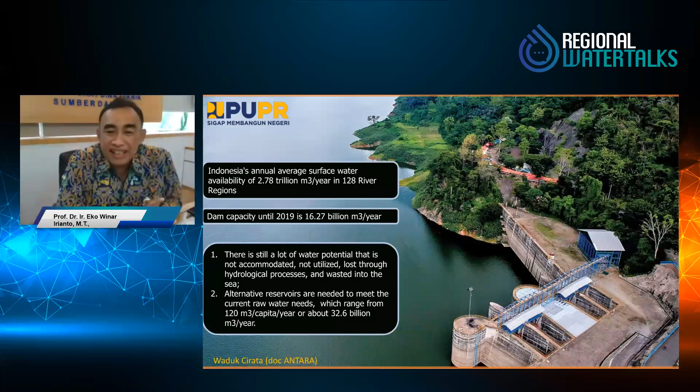But first, there is still a lot of water potential that is not accommodated. This is the problem: the main issue is that water is not utilized, and it is also lost through the hydrological process, flowing into the sea freely, not being used.

The second point is alternative reservoirs. Not only conventional reservoirs are needed to meet the current raw water needs, which range around 120 cubic meters per capita per year, or about 32.6 billion cubic meters per year.

Now, in Indonesia we have 34 provinces, and around 23 of the provincial capitals are located in coastal areas. So this represents a potential for the application of estuary dam technology.

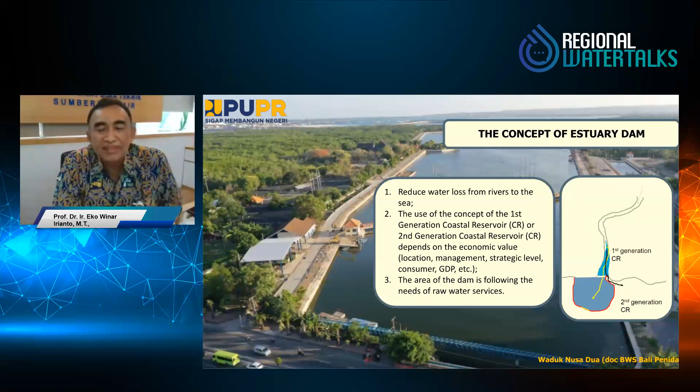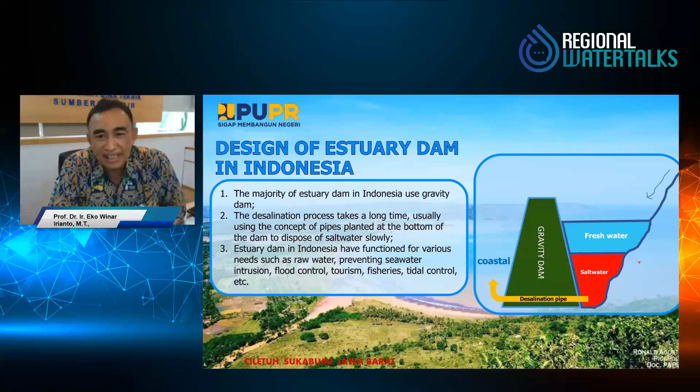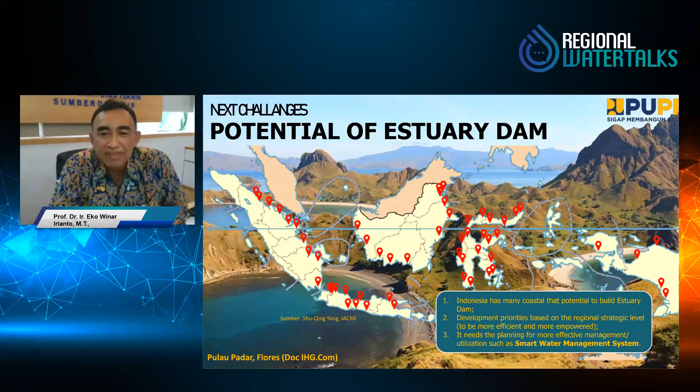The second point is development priorities based on the regional strategic level. Before we build the estuary dam, we need a feasibility study to ensure it's suitable for the location. The third need is planning for more effective management, such as improving system utilization through a smart water management system.

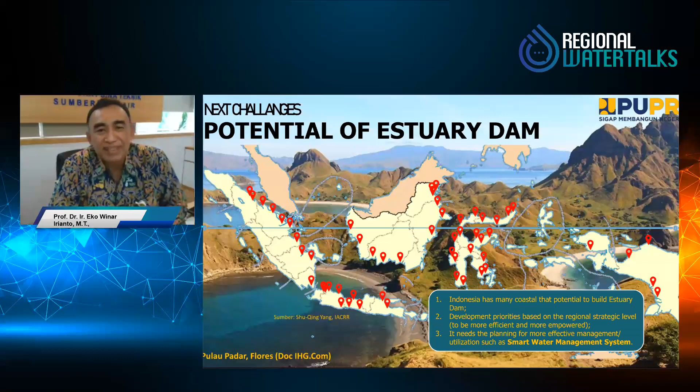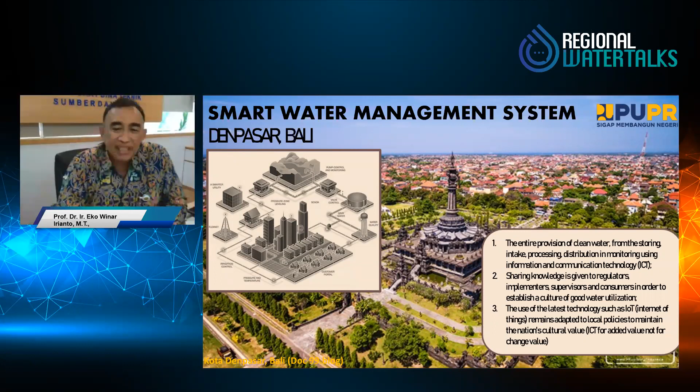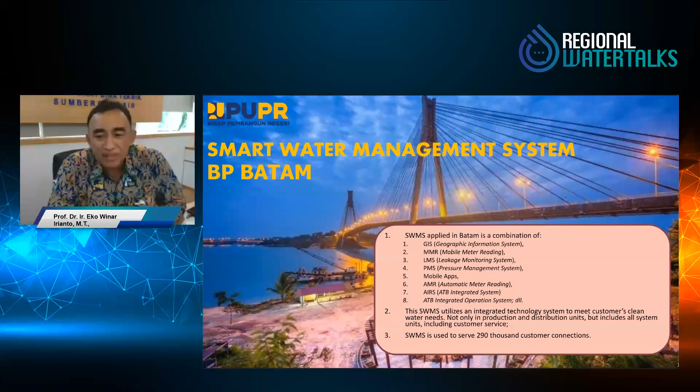This smart water management system utilizes an integrated technology system to meet customers' clean water needs—not only in production and distribution units, but including all system units, including customer service. In Batam, the smart water management system is used to serve 290,000 customer connections.

I will explain about the first generation coastal reservoir, or first generation estuary dam, and also the second generation of estuary dam in Indonesia. First is the Duriangkang Dam in Batam.

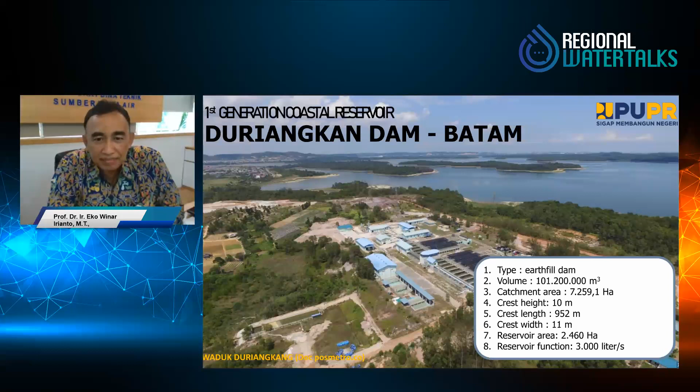This is Monggak Rempang dam in Batam. This is an earthfill dam type. The volume is around 4.5 million cubic meters, and the crest height is 8 meters, so less than 10 meters, not so high. But the reservoir area is around 155 hectares, and the reservoir function is around 232 liters per second.

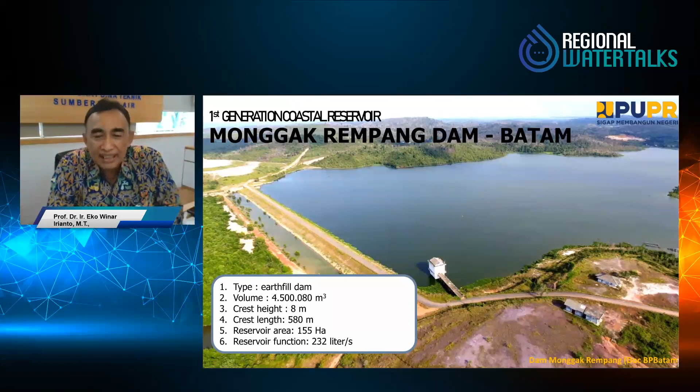This is a first generation coastal reservoir or estuary dam in Bali, called Nusa Dua estuary dam. The type is earthfill dam, the volume is around 770,000 cubic meters, and the crest height is 2.85 meters. This is very low, not so high, but the catchment area is rather large, 40.95 square kilometers. The reservoir area is only 35 hectares, but the reservoir function is around 300 liters per second. So Nusa Dua estuary dam serves the Nusa Dua tourism area.

This is the concept of Nusa Dua estuary dam. This is one of the public green open spaces in southern Bali.

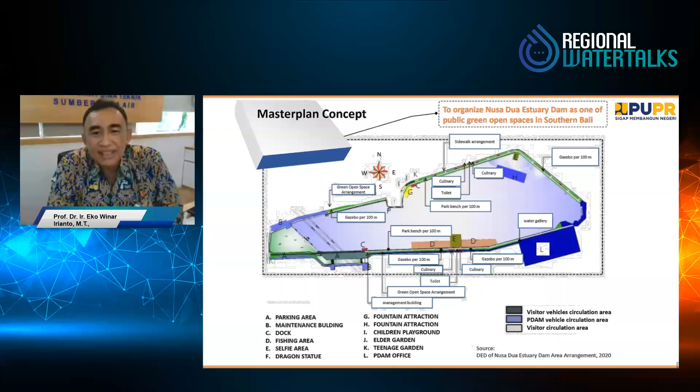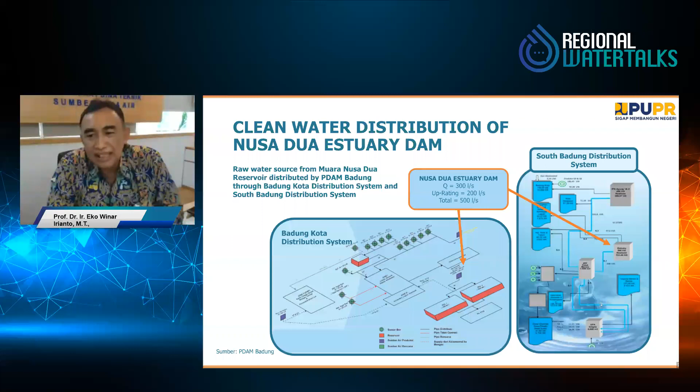Nusa Dua estuary dam serves the South Badung or Badung Kota distribution system, including the Nusa Dua distribution system.

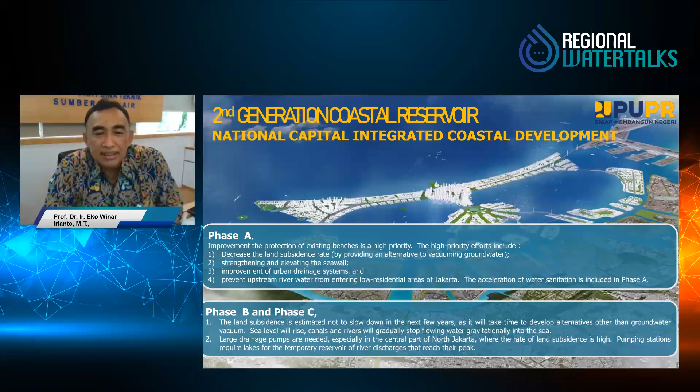We are now still studying the second generation coastal reservoir or estuary dam, which will be built in the national capital, in northern Jakarta. It's still a study, called the National Capital Integrated Coastal Development.

In the study there are 3 phases, but phase A is improvement. Before building the estuary dam, we must give high priority to decreasing the land subsidence rate, because the problem in northern Jakarta is that the land subsidence rate is rather high. So we need to decrease the land subsidence rate, with one alternative being to reduce groundwater extraction.

The second is strengthening and elevating the seawall, and then improvement of the urban drainage system. The fourth is preventing upstream river water from entering low residential areas. This is like a polder system. We need to build the polder system to reduce the flooding area and accelerate water sanitation around the northern Jakarta area.

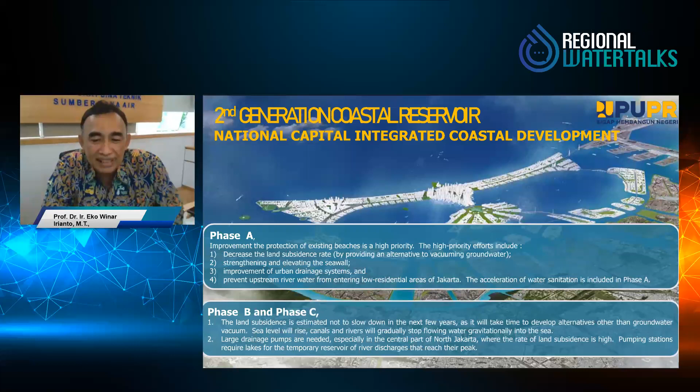Large drainage pumps are needed, especially in the central part of North Jakarta, where the rate of land subsidence is high. So pumping stations require something like a pond, what we call a polder, for temporary reservoir, in order to handle river discharge, especially at peak conditions.

This is just a little presentation from me, and we hope this can explain the application of estuary dams in Indonesia. Thank you very much for your attention, and now back to the Master of Ceremony.

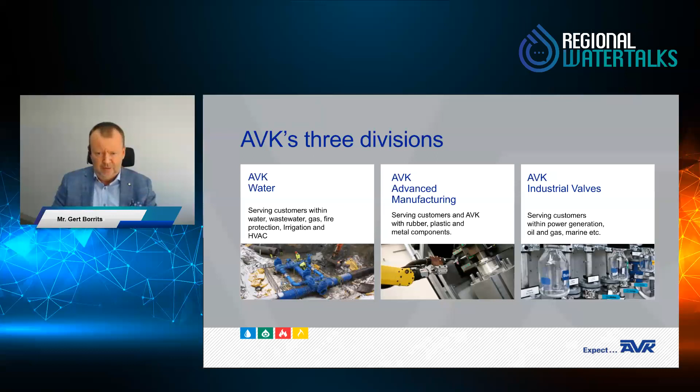We are working in three main divisions. We have AVK Water - I'll get into a bit more detail on that in the next few slides - and then we have AVK Advanced Manufacturing, and we have also AVK Industrial Valves. We'll go into more details now.

We have a main theme, we call it Expect AVK, which also serves as a commitment to our market. We have 8 promises in our company structure: Expect quality in every step. Expect solutions, not just products. Expect lasting innovations. Expect long-term partnership. Expect total savings. Expect global leadership and local commitment - I think the enormous amount of companies we have around the world certainly expresses the local commitment very well. And expect prompt response, and expect to be effective and easy. Those were the main 8 promises we have to our customers and the market.

In Southeast Asia we have 5 main companies, and then we have a small branch in Phuket and in East Malaysia. We have our sales company in the Philippines, in Manila. We have a sales company in Vietnam, in Ho Chi Minh City. And then we have our sales company here in Jakarta, covering Indonesia and East Timor. We have our sales office in Singapore. And then we have a combination of sales office and production facilities in Malaysia, where we can assemble most of the key products within our water business. We're also doing a broad range of stainless steel repair clamps for the Southeast Asia market.

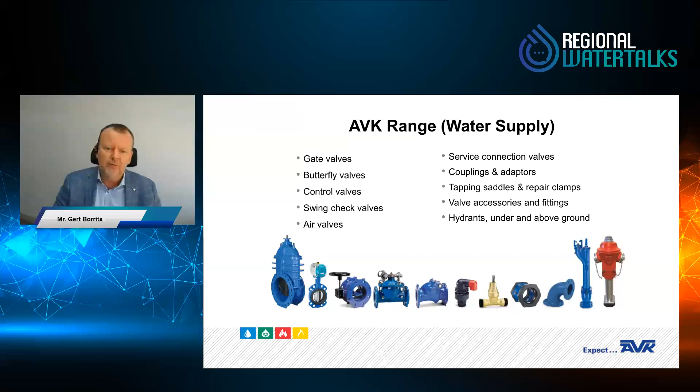But I do want to recommend, if you have more interest, to go to our web page. At the beginning of our web pages you have a selection program that will guide you to what sort of products you need for each application and installation. It'll simply come up with some suggestions for you, so I recommend you go in and have a look at it.

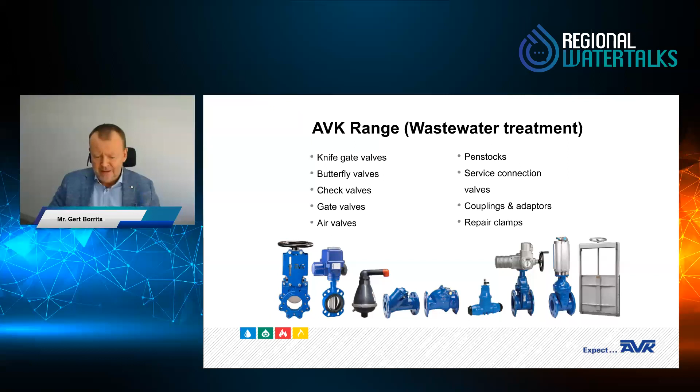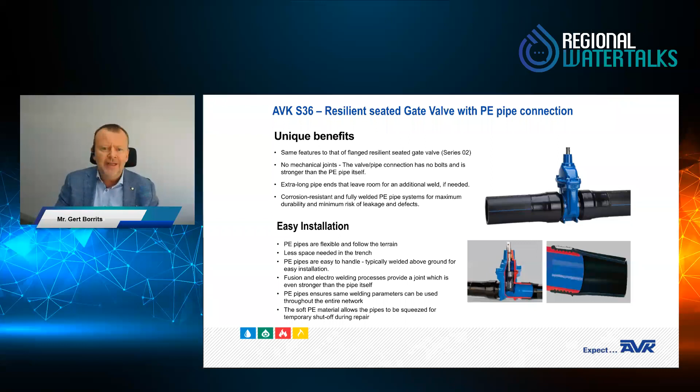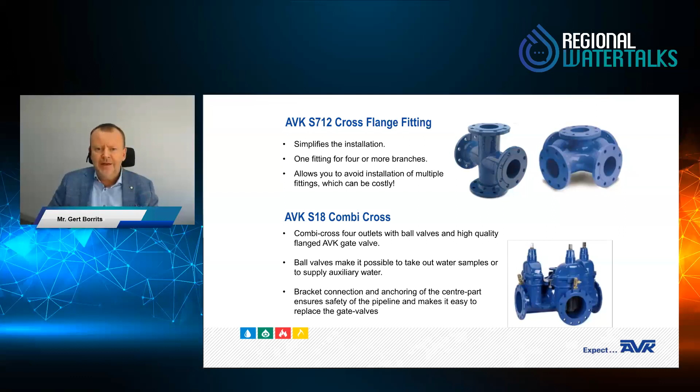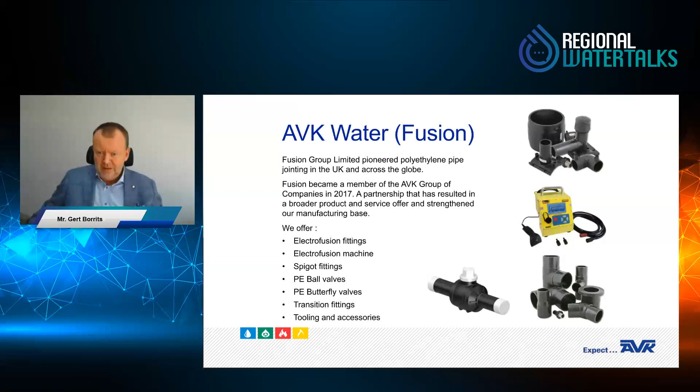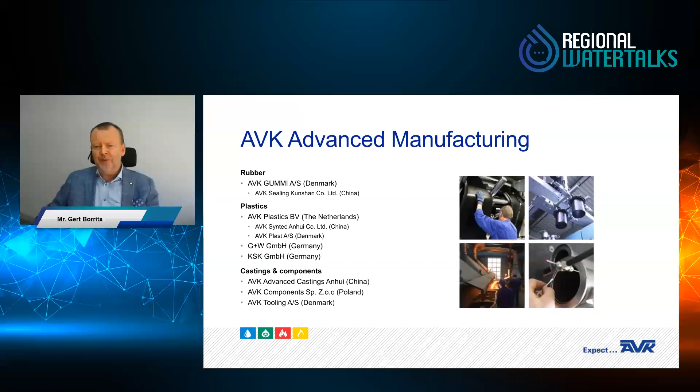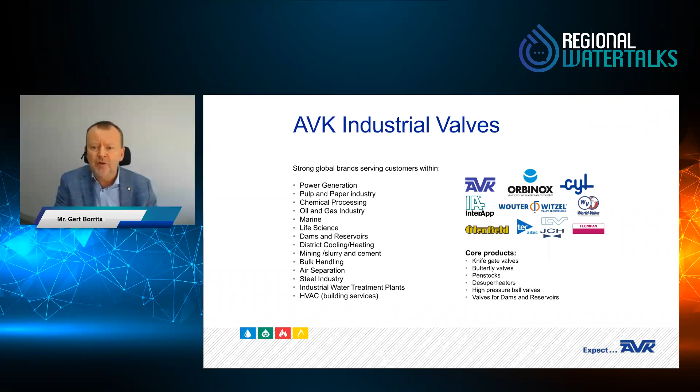All right, next slide, please. Am I off again?

The next slide, please.

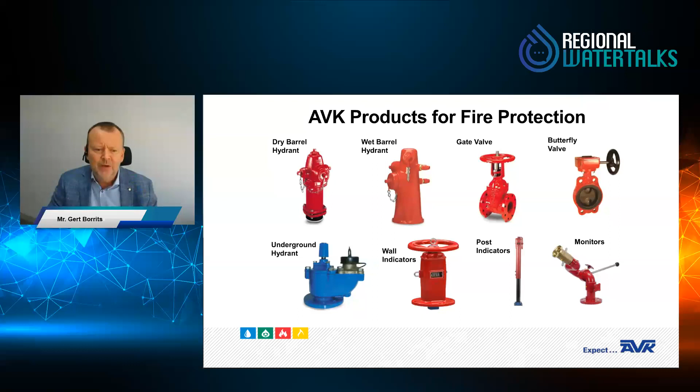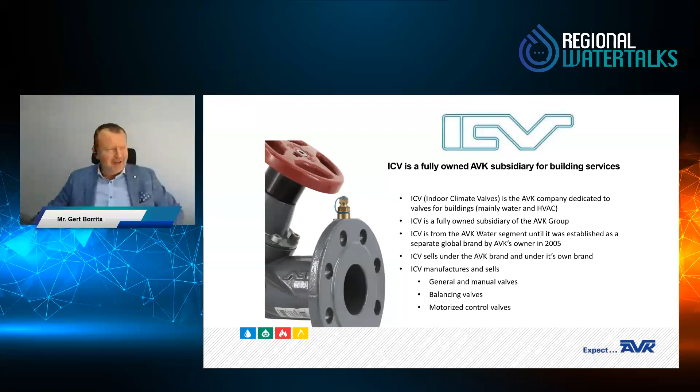Excuse me, your sound is cracking, you might want to check the microphone connection to the cable. Is it better now? It's cracking, so we cannot listen to you clearly. Maybe just speak a little slower, I think it's the microphone. Maybe you can change to wire mic. Let me just try here. Can you help me change it? Sorry about that. No, that's okay, I think everyone's agreed there's always some quirk in Zoom sessions. Is it better now? What about now? It's still distorted. I'm not sure what to do. Can I get it over to the computer? Let's do that then. Take it out from the speakers here, right? This one here, right? Can you please try mute it and unmute it? Hello. Is that better with the sound? Honestly, I still don't know, it's distorted, everything is bad. Maybe because I got my second vaccine last night, so maybe it's taking effects on the voice as well.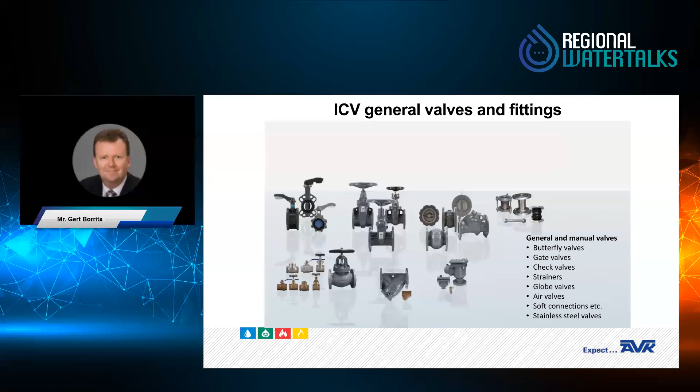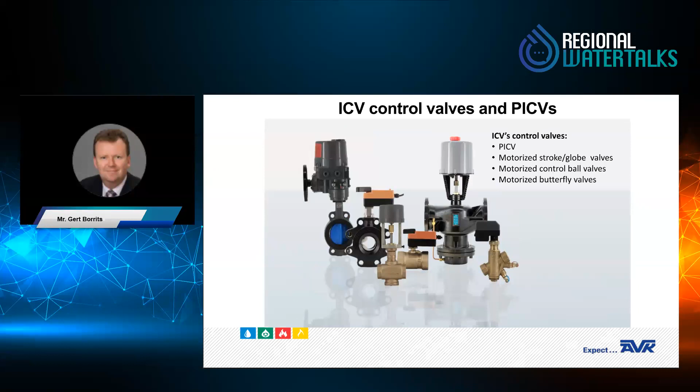And the next one. And the next one.

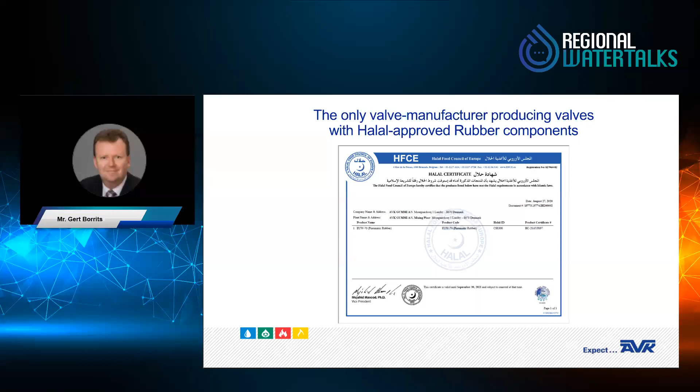Now I'll try to go in and give a brief information about dams and reservoirs. I want to stress before I start that this will be brief, but if you have interest in dams and reservoirs, I know here in Indonesia we are developing a lot of new dams and reservoirs. There's a lot being built at the moment, but also a lot in the planning stage. So some of you might want to hear more about that, and I will urge you to contact any of our companies in the region. But here, just a brief information and introduction of what we can actually provide into dams and reservoirs.

The next one, Jan, please.

So dams functions, as we see it: clean water reservoirs, power plants, flood controls, irrigation. Actually a lot of the dams that are being built and planned for at the moment have a multi-purpose usage, so they're not only used for clean water, but also used for power stations, for cooling water, to act as flood control, and also for irrigation. So when you have a dam and reservoir project, you also tend to have a lot of other opportunities in terms of valves. That's why this segment is very important for us as well.

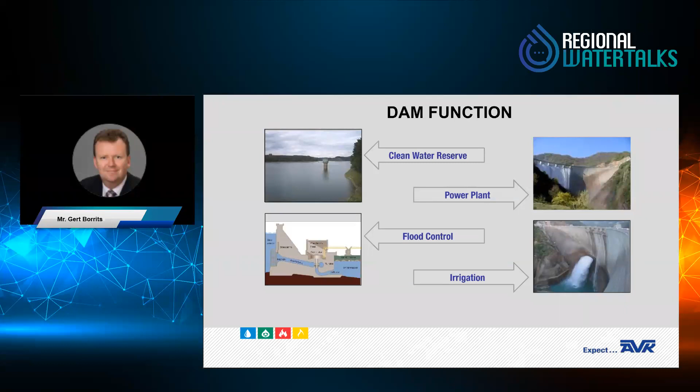Next slide, please. Different applications: bottom outlets, systems. They're all different, of course. Depending on the design, we use different products, obviously. Spillways and canals.

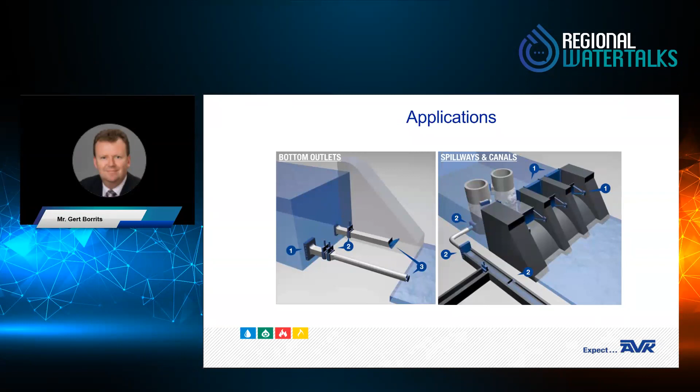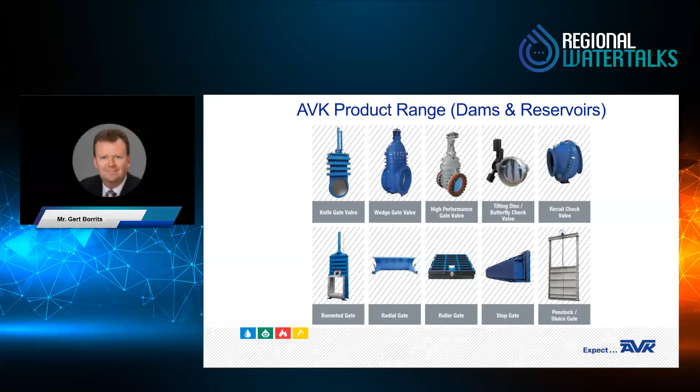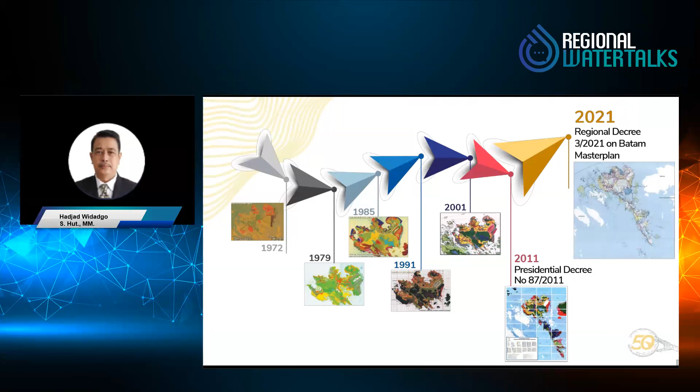Now for implementation of government regulation number 41 of 2021: this is the strategic policy for managing the free trade zone and free port of Batam, Bintan, and Karimun, to improve the investment ecosystem and enhance economic growth opportunity and regional competitiveness. For water availability, we have cooperation between Batam Island, Bintan Island, and Karimun Island. I think this is our challenge and our opportunity to secure water for the future.

We have infrastructure in Batam Island free trade zone, like Hang Nadim International Airport Batam, seaport, electrical power supply, expansion of BP Batam Hospital, road infrastructure including Barelang Bridge, internet and telecommunication, an IT center, and 7 operating plus 2 water reservoirs under development.

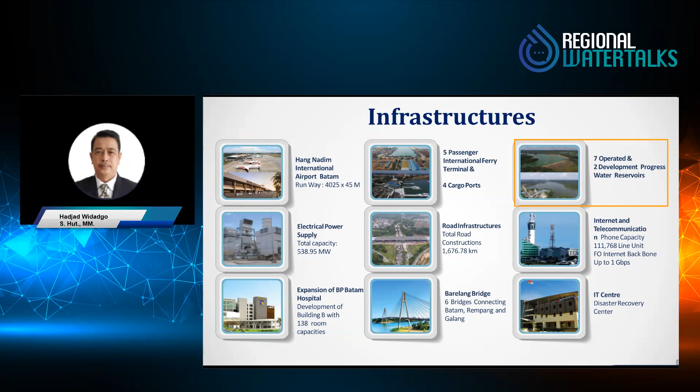We have about 26 industrial estates, and industry needs about 30% of the water availability in Batam. So water availability is very important for the competitiveness of the industry area.

Another influence on the availability of water to provide to the Batam free trade zone is the population and workforce. In 2020, the population in Batam was more than 1,400,000 people.

As I mentioned before, Batam Island, Setoko, Rempang Island, Galang, and Galang Baru are connected with the Barelang Bridge. We have the bridge that connects the islands. Our coastal reservoir can transfer the water, the raw water or the clean water, to another island using the connection from Barelang Bridge.

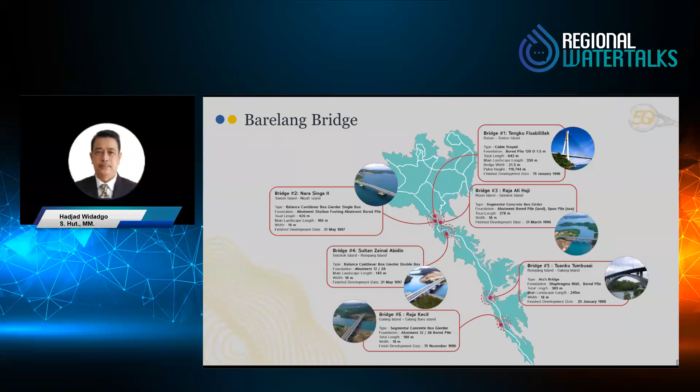We're talking about coastal reservoir. Our fresh water total volume is about 151 million meter cubic. And our water treatment plant design capacity is 4,682 liters per second, total capacity now about 3,850 liters per second, and operational at 3,600 liters per second.

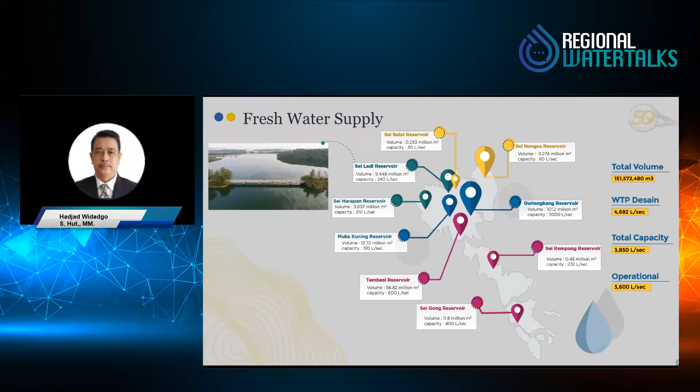Freshwater supply that we present now, we're talking about in the orange circle: the first coastal reservoir, Duriangkang, Tembesi, and Rempang in Rempang Island.

The development of the coastal dams like Duriangkang, Tembesi, and Rempang - in this case Duriangkang - the process starts from community resettlement from the catchment area and the reservoir area. After we make the resettlement, we clean up the location of the reservoir and catchment area, then we make the pilot dike to develop the platform with sand and earth fill until the height of plus level.

We develop dam complementary buildings like a permanent bottom outlet, intake tower, and spillway. For desalination, we install an uploading pipe of diameter 800 millimeters, and the desalination process runs from this pipe.

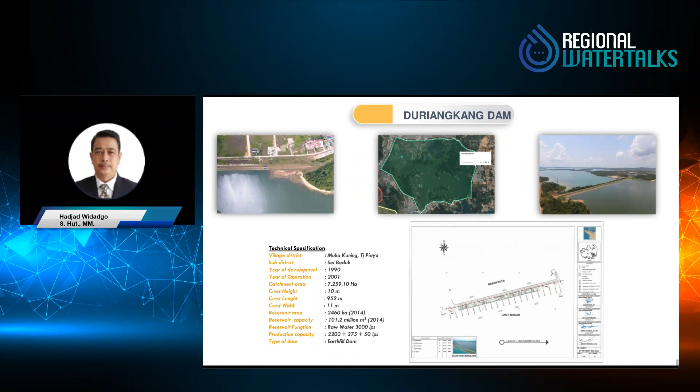This is Duriangkang coastal reservoir. The left side is the reservoir side, and the right side is the sea side. On the sea side we see the vegetation of mangrove around the island in the middle - we call this Dongkol Island, the island that connects from the dam, then from the Batam side, and then the Piayu side.

We see the inlet tower for the permanent bottom outlet, and on the right side the outlet tower. At the outlet tower, from the permanent bottom outlet, we made a special structure to slow the water flow to the sea, because the fishermen might have a problem if we open the gate of the permanent bottom outlet.

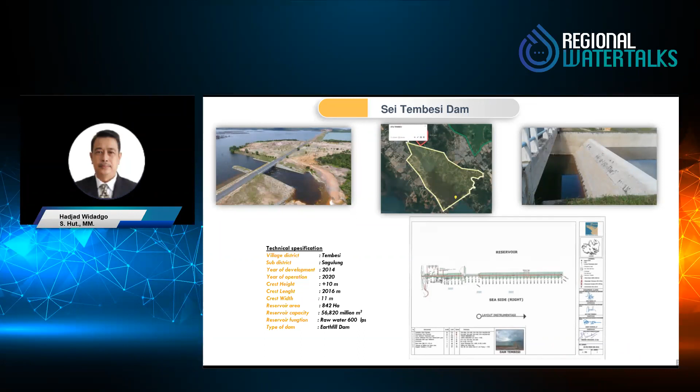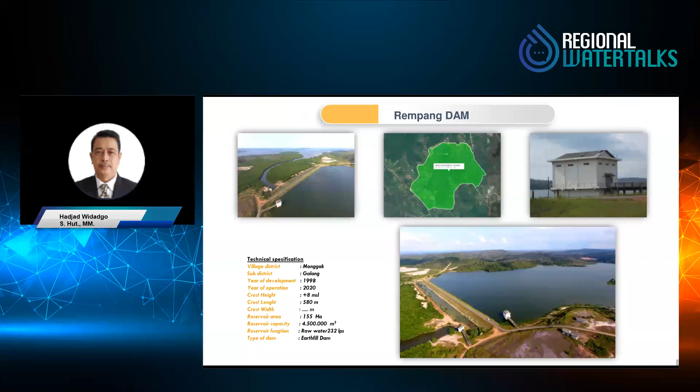We see in the picture the Rempang Reservoir. In the left picture, the left side is the sea and the right side is the coastal reservoir of Rempang Island. In the middle we see the map of our catchment area that is protected by regulation, and on the right side is the intake tower located at the reservoir site. We have about 4,500,000 meter cubic capacity of storage for Rempang Reservoir.

Now about the benefits of coastal reservoirs, and of course together with the challenges.

We have a benefit to reduce land when we build the coastal reservoir, because we save land utilization by not using on-land reservoirs, and we promote more oxygen and carbon sink during photosynthesis. Trees and plants absorb carbon dioxide from the atmosphere and process it into oxygen. As the tree grows, they store carbon in their trunk, branches, roots, and leaves.

The catchment area in the coastal reservoir functions like an urban forest that conserves energy by shading and cooling homes and buildings, increases air quality, reduces water consumption by reducing landscape watering needs, and increases atmospheric moisture. The vegetation in the catchment area also reduces water runoff and soil erosion by breaking rainfall and holding soil.

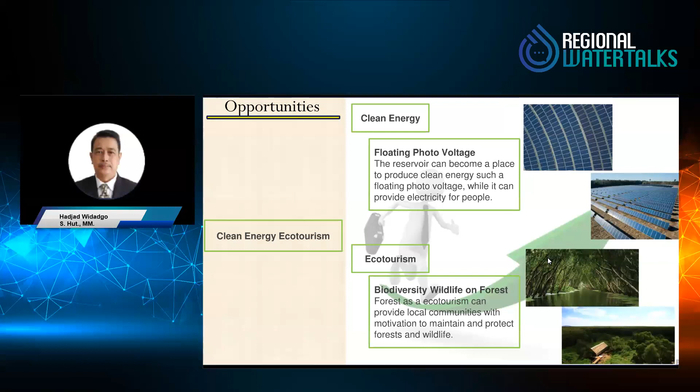But monitoring of the catchment area is very important because of the potential risk of pollution. As there is no intensive cultivation, the risk of pollution from agriculture, like pesticide and herbicide, is not significant. But now we have challenges like illegal farming and others, so we should overcome it.

The main risk also comes from industry and human presence related to industrial activity. Pollution control arrangements to provide catchment area protection, and pollution control for the protection of Duriangkang Reservoir, are a matter of great concern, and appropriate measures must be taken as much as possible to maintain the quality of water.

It is clear that all areas we hope are still free of human settlement must be kept as they are in the future. Any new installation must be strictly forbidden. In particular, all permanent housing in forest areas should be avoided and forbidden. All dumping of waste should be forbidden to maintain the quality of water in our coastal reservoir.

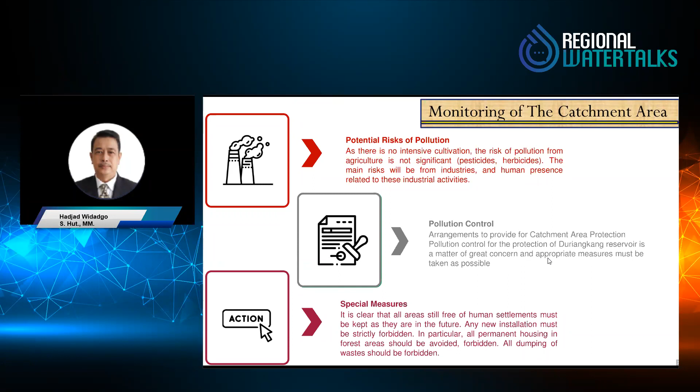The challenges come from the quality of water that flows into the storage. So we make a few efforts to overcome it, like the sand trap and trash rack.

The sand trap is used to trap sand going into the water, so it gathers at one point and cannot go into the water. The trash rack is used to prevent floating and particulate debris from clogging the stormwater outlet control structure.

Another measure is the sewage system to handle sewage from households, to provide good quality water and even prevent flooding because it can deliver water to another place. Now we have a project, but only 200 liters per second, in the center of Batam.

We have vegetation on the surface of the reservoir we call hyacinth - in Indonesia we call it eceng gondok - and another called semalu. The vegetation like hyacinth will reduce the amount of water, so it needs to be cleaned for a better water environment system.

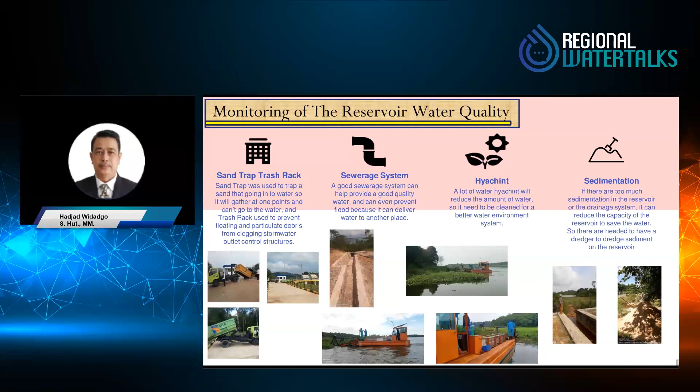Recovery action, maybe we have a few, like tree plantation. With tree plantation, we can reduce the amount of stormwater runoff with reduced erosion and pollution in our waterways, and may reduce the effect of flooding. The tree plantation we do by government, and another we make cooperation with the industries to maintain the catchment area.

In the dry season, we have a problem about our storage. So we make modification with technology, and the most common form of weather modification is cloud seeding, which increases rain, usually for the purpose of increasing the local water supply. This happened in Batam when we have a dry season of more than 8 months, so we use the weather modification technology to overcome the problem.

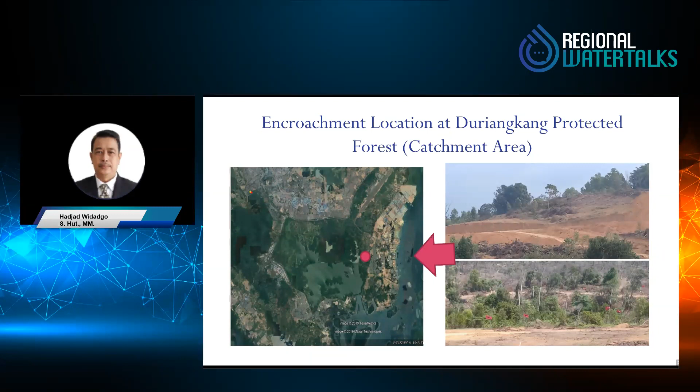The next challenge is the encroachment at Duriangkang protected forest, the catchment area, because illegal people make the illegal action to cut down the trees, and then make a location for settlement and other purposes. We have to make an effort to stop the activity, and then we should make a plantation to remedy the situation of the catchment area.

Another problem and challenge is forest fire and land issues in Duriangkang catchment area. During the dry season, illegal farmers use the location to make a farm, and for easy opening of the location, they set fire to the land. So we enforce the law on the farmers, and we try to do plantation again.

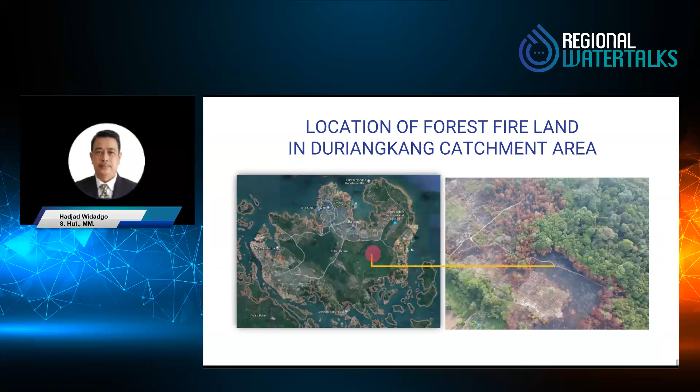This is the case in another reservoir in Batam, because if we cannot overcome the catchment area problem from illegal occupation, the problem may be like in this picture. We have bad quality of water and hyacinth in almost half of the reservoir, and the quality of water of course gets worse and makes problems. Now the reservoir, we cannot utilize effectively.

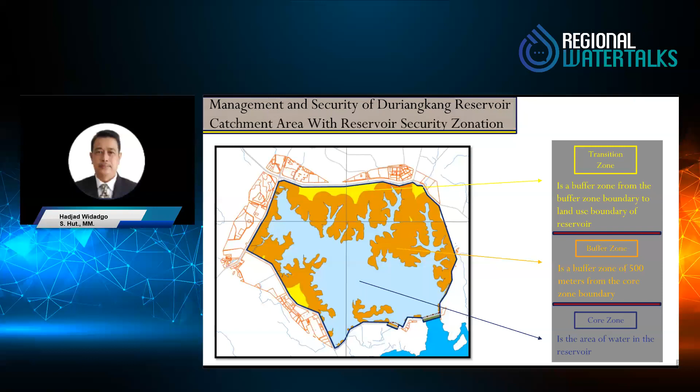To manage the security of the Duriangkang Reservoir, particularly the catchment area with the reservoir, we make 3 zones. The first is the core zone in the storage or water side, and then the buffer zone, about 500 meters from the edge surrounding the water, and then the transition zone in the yellow area, where we can make activity, but very strictly to maintain the catchment area.

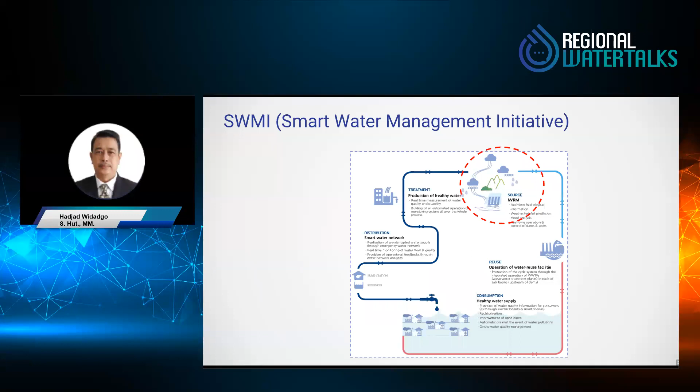For smart water management initiative, we need to revert to integrated water resources management.

Batam needs 7,000 liters per second in 2045. So we need more water.

In the Batam Integrated Total Water Management, we have 4 sources of water, coming from stormwater, the coastal reservoir or on-land reservoir, desalination plant, and recycled wastewater.

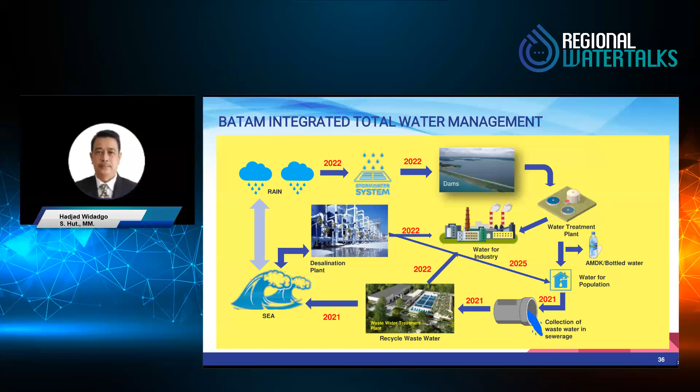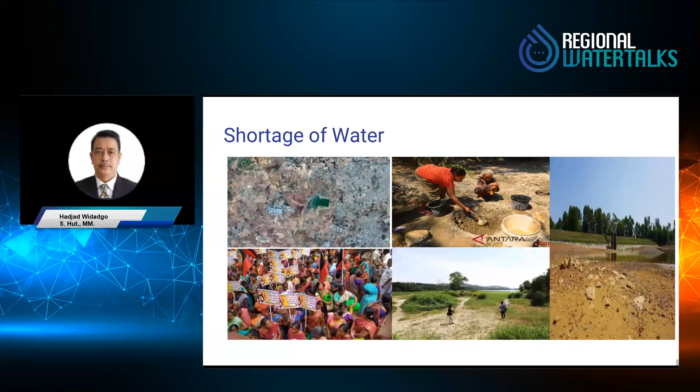Yes, we protect from this shortage of water during the dry season or the climate change problem. Thank you for this presentation.